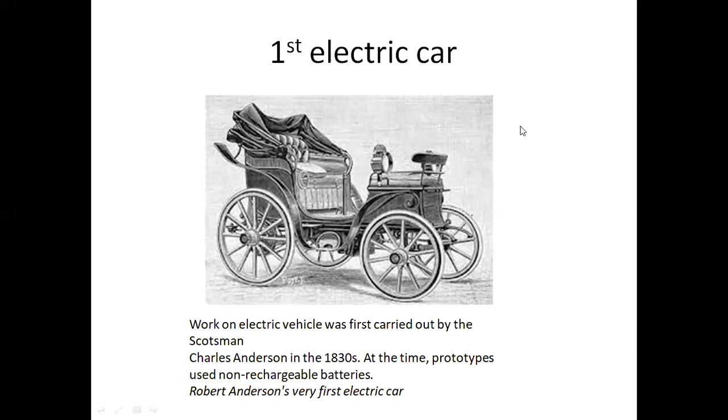I started off with the history of it. The first electric cars, surprisingly, go back to Charles Anderson in the 1830s. A lot of people don't know that, and they didn't use rechargeable batteries - it was a container underneath the driver's seat, like a copper tin with plates in, and they poured acid into it to form the electricity. You can imagine the dangers involved. They were limited by the time the solution actually worked, and it was dangerous. So electric cars haven't just come to light - they're not a modern day thing, which is one of the things a lot of people assume.

So the history - the first battery powered car, and we're talking batteries, not the early lead acid in a tank, goes back to 1881. Then electric charging points started coming in, and as you can see from the top right hand picture, it was a bit of a mess, very dangerous - health and safety didn't exist then.

Taxis started coming out in 1899, and underneath the taxi was the battery. Taxis were great because they got around town, there's no horses to feed or anything, they just kept going. And the technology itself was quite rapid - the first vehicle to exceed 100 kilometers an hour was actually an electric car.

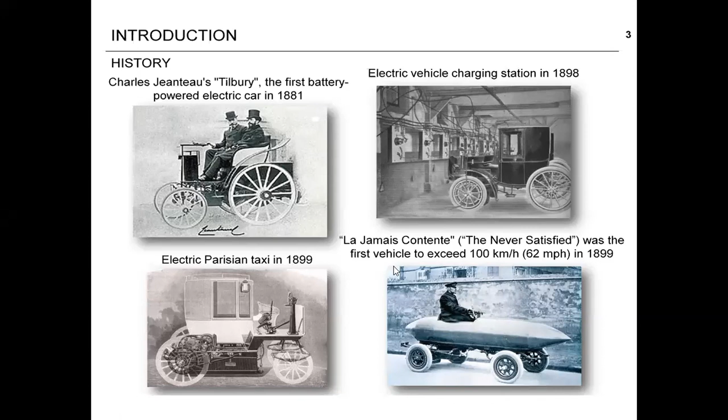So the French were really developing this and moving on with it. But petrol came out, didn't it? And as petrol came out, it took over. But they still pushed it - they modernised, if you can call it modernised, the charging points.

With the charging points, this one is actually a copy of the poster from PSA, the company that was selling these electric cars. I wouldn't like to be the person that actually plugged that in and cranked the voltage up. There's a copy of this in a museum down at Coventry, and all them connections are live.

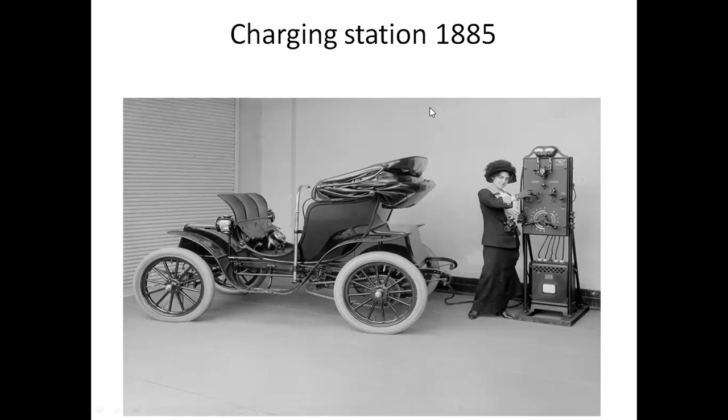Again, a bit like the car, they were just known as the horseless carriage, but very quiet. People didn't like them for the simple fact they were too quiet - people were getting knocked down, unlike the petrol and the diesel where you could hear them coming. With electric cars, you couldn't. So it did get a bit of a poor following from day one with the electric vehicle.

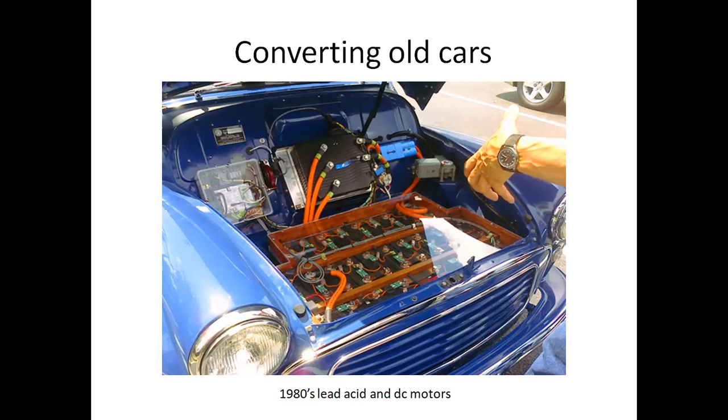The plastic perspex covers are put on top to safeguard any issues. The big black box bolted to the bulkhead is an inverter, and all the other electrics are in there. So if you've got an old car, don't think it's scrap just because you haven't got a battery in there - you've actually got one that can be converted. A number of companies do it, but unless you've got an absolute prestige vintage car, it's not really advisable.

Then somebody came up with the idea of hybrids, and they've all been petrol hybrids, which means partly it's run on battery, partly it's run on the petrol.

Peugeot brought out the very first diesel hybrid in 2011. Now, the very first diesel hybrid was a big flop. I worked for the company, I don't mind saying, because what happens with diesels is they rely on a lot of high mileage in order to keep all the injectors clean, the fuel system clean. A diesel that just ticks over just clogs up and destroys the engine.

What was happening with these was they were just ticking over to charge the battery. Then the minute the battery was fully charged, the diesel engine would cut off. So in effect, you never really blow the engine out and get all the soot out of it. It just destroyed engines left, right and centre, which created a major problem. That's why they stopped doing them.

I'll warn you about this because whenever you see one second hand, unless you know the history of it, it can be a dangerous thing to buy the hybrids. Another reason for mentioning it is nowadays you will not usually find a diesel hybrid because of all these problems they had. They've realised the general public car doesn't really work that way, so you'll only find petrol hybrids.

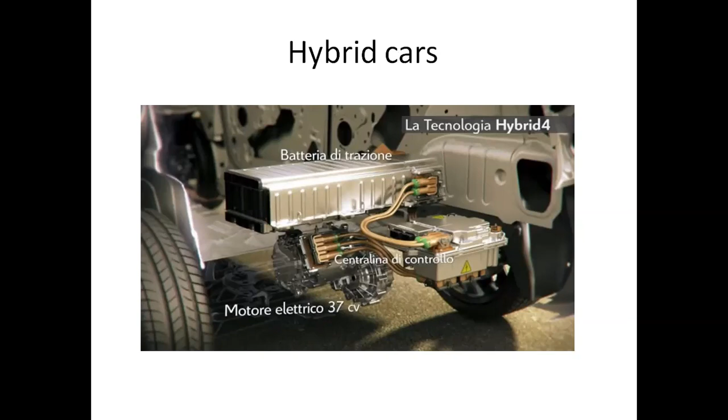That's a top view of the battery. Battery's up on top, and we've got the control unit, and we've got the spare wheel, which you don't have a spare wheel, so it's actually a pump.

All the orange cables are what you stay away from. The reason I say this is if ever you're going mobile and you decide to put a rig into your car or whatever you want to put into your car, stay away from the big thick cables. These big thick cables, no matter what the manufacturer is, whether it be Volvo, Renault, Peugeot, BMW, they're running on average 400 volts. Now, 400 volts, as you can appreciate, it'll give you a very, very nasty kick. But people sometimes see big, thick cables and think, that's carrying a lot of power, a lot of amperage. I can put a big linear on that, yeah.

So that is where the spare wheel goes. So when you're buying a hybrid, that is what you've got. Now, that weighs close on to about a quarter of a ton.

So one of the myths that came up was, well, I don't seem to get much fuel economy out of my hybrid car when it's running on petrol. The reason is because you've got a standard car, whether it be petrol or diesel, which does the standard fuel economy, 38, 40, 50 miles per gallon, whatever it does. But then it's like towing a little trailer around with you. You've got a quarter of a ton in the boot. So straight away, if you get a car and start towing a trailer, your fuel economy is going to be going down. So when people were saying, well, the fuel economy on a hybrid is nowhere near what mine is, they weren't taking into consideration the quarter of a ton sat in the boot.

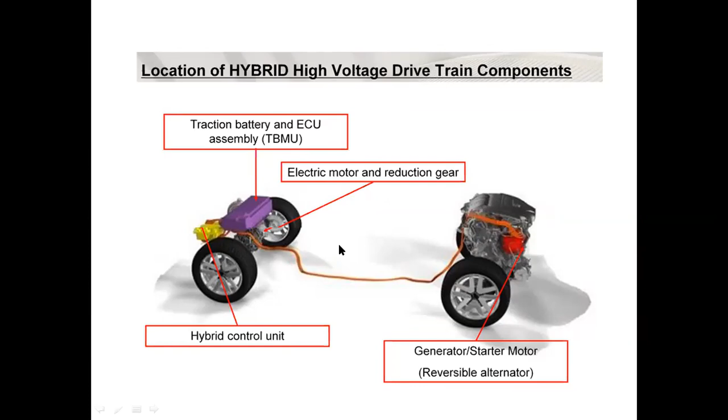With all this technology comes a bit of a problem. If we look at the diagram, we've got blue pipes. The orange pipe is actually the wires carrying the power from the front to the back, the electric. But underneath is actually the coolant pipes. The electric motor, the battery, do get hot because as you go uphill, it uses charge, but as you go downhill, it puts charge back into the batteries. And we all know when we're charging a handheld, the actual handheld battery can get quite warm. So it's exactly the same. So for that reason, the rear end is actually connected to the front end via coolant pipes.

I mention this because if you do decide to put rigs into the car and you do decide to sit there mobile and you think the battery's going flat a bit, I'll start the engine up. Anybody sat in the back seat will soon start getting a heating feeling to the back, yeah, because your back seat is actually underneath that is the battery. So they do get very warm on the back seat if you just sat stationary because it's relying on air going underneath. So it's just something that people don't realise that you've got all this.

My concern is speed humps. Underneath the car is all these wires and cables. If you hit a speed hump at the wrong speed and you do some damage, who's going to be liable? The council for speed humps being, you know, not kept the same or raised too high, or the driver because they're driving too fast. But there can be a lot of damage done underneath.

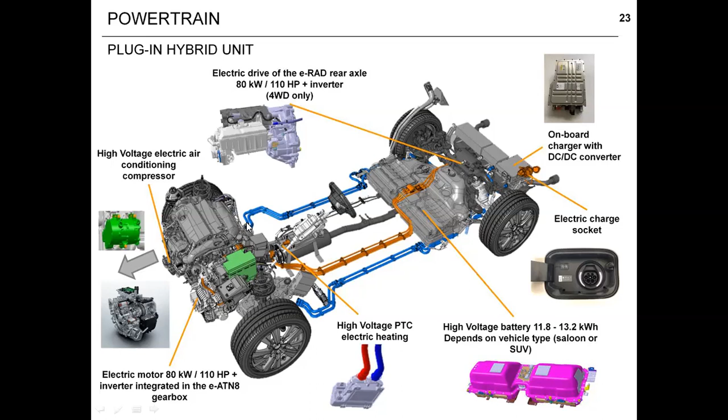If we have a look at the thing, you can see the electric motor on the back, 110 horsepower. We've got 110 horsepower normal standard engine on the front, so that's 220 horsepower this particular car will perform with. And we've also got the battery at 13.2 kilowatt hours. So it does depend on the car and everything else as to what exactly happens with these.

On an electric vehicle, when you lift the bonnet, that's what it looks like underneath. So there's nothing to check, there's nothing to see. But we do have people that pass cables through bulkheads and try to connect things to batteries and alternators to get charge for anything from an audio amplifier to a big linear for, dare I say it, CB. We have had people trying to connect 200 watt linears and coming in and saying, how do I connect this? But as you can see, every single cable under there is orange, so you cannot connect to that.

Underneath the bonnet is pure 400 volts. That's all there is. But what you have to be careful of, and what a lot of people don't understand, is this is where it starts getting a little bit dangerous. It's not just 400 volts DC.

In order to make the motor more efficient, and if you remember at the beginning I was saying that when you put your foot on the accelerator it takes time sometimes for it to respond, depending on the weight, the way we've got around this is to do it at 400 volts, 3-phase AC. So you've got inverters that convert the 400 volts DC into 400 volts AC. So you have actually got 400 volts AC floating around in the car. So this is where it starts to get a little bit dangerous.

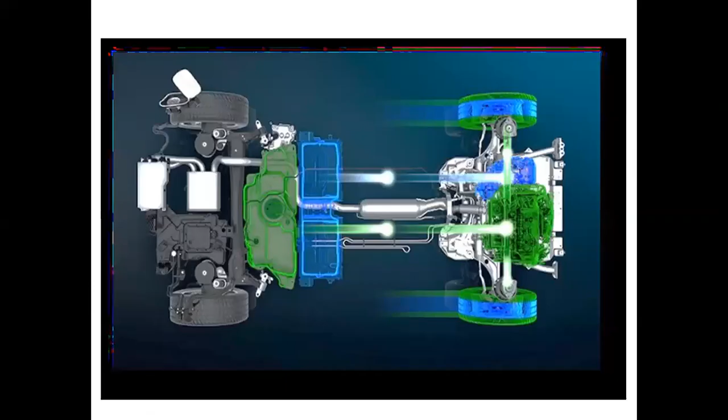This just gives you a diagram of what actually happens. The green are the power units. We've got at the back the green fuel tank because it's a petrol car. We've also got power going from the petrol tank up to the actual engine. So it takes fuel, takes it up to the engine, that produces the power, it goes down the drive shafts and it moves. But also we've got batteries under the back seats. That takes 400 volts up to the electric motor, which is up at the front on this particular model. So you've then got an electric motor that can also power it. So the clutch can disengage between the engine and the electric motor.

So the problem with that is it's got to disengage while you're driving and switch between petrol and electric. And again, that's where the electrics come in. You have no control over this and you have no say over it. Computers do it. The average electric car has somewhere in the region of 24 computers controlling everything. So when you install something extra into an electric car, one thing you've got to be careful of is where you connect. Because if you connect to the wrong thing and it messes around with the data wires, or takes a little bit of the feed or the earth, because they're very critical, these 0.3 of a volt drop can actually throw something out. All sorts of faults and they just won't move. They don't come up with the engine warning light on the dash. They just don't move.

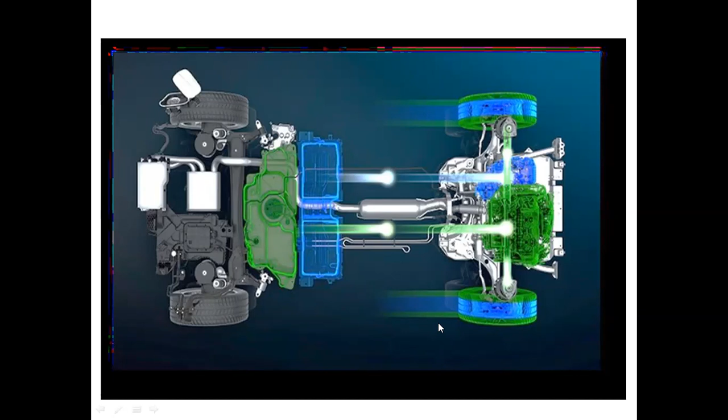It's a fairly generic thing that goes through all manufacturers. If you look at the back of a BMW, a Volkswagen, an Audi, Peugeot, Citroen, they're all the same. There's one company in Morocco that makes these for all these manufacturers. So it's a fairly generic thing that is made, but it is quite a complex thing. Like I say, between that and the battery, there's a quarter of a ton.

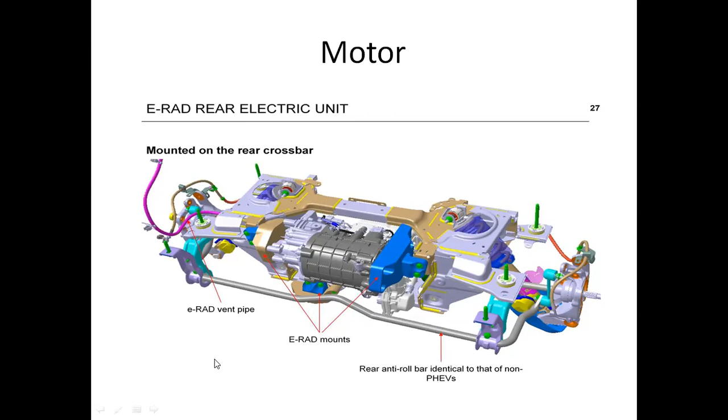So it's not something you can repair at home, but it gives you an idea of what's underneath there. We have actually had a car in the garage that had the motor banged. They'd gone off-roading a little bit and managed to somehow get a boulder into the motor and damage the casing. So they're not indestructible by no means.

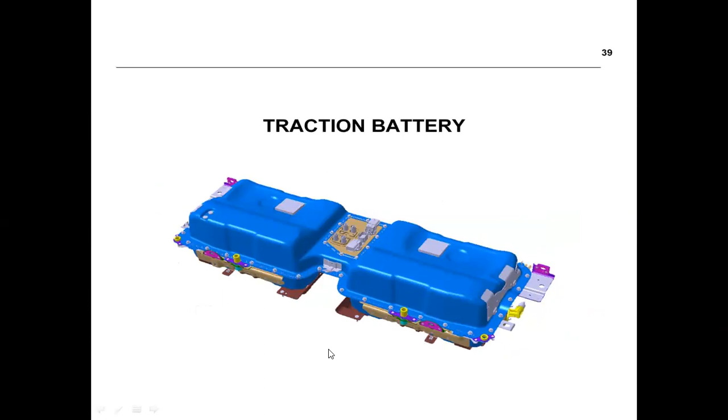One bank on the left and one bank on the right. The bit that goes in the middle, you think, well, why does it? That's actually the exhaust. The exhaust runs down the middle of the car, just the same as any other standard car. It's just this is basically you've lost half a fuel tank. That's how they've done it. You've lost half a fuel tank to do that.

It's handy to know what's in the car and what's underneath. People say, well, what mileage will it do? How far will it go? Basically, how big is the car? Because the floor of an electric car is the battery. So the bigger the floor, the further it'll go.

If you look at the area of a Tesla, the actual area that the floor pan covers, which is where the seats go, is much bigger than most cars. So therefore, the car can go a lot further. But with the bigger battery comes more expense, hence the reason why a Tesla is so expensive. How it produces everything is pretty much the same, the technology's there, it's just their battery is a lot bigger, hence the car is a lot heavier. And for that reason, yeah, I wouldn't say it's a better car, just more expensive.

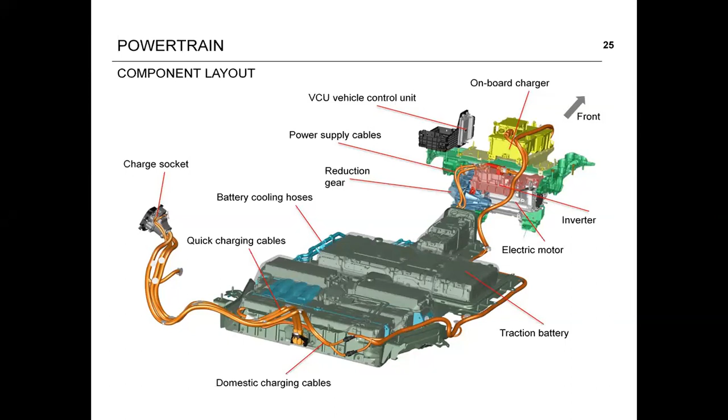The vehicle control unit, which is just next to the onboard charger, is what replaces the old engine ECU, the old computer. It still has one of them, and it still controls everything. But it just gives you an idea of what's underneath there, what exactly is going on.

There are 2 versions of the battery that's made. At the moment they're made in China, 11.8 kilowatt hour and 13.2 kilowatt hour. There are factories now coming up to compete with the Chinese, which will bring the price of a battery down. If anybody's wondering the price, we do hear rumours: hybrid batteries average between £5,000 and £8,000 depending on size, and a full electric one is between £12,000 and £15,000 just for the battery.

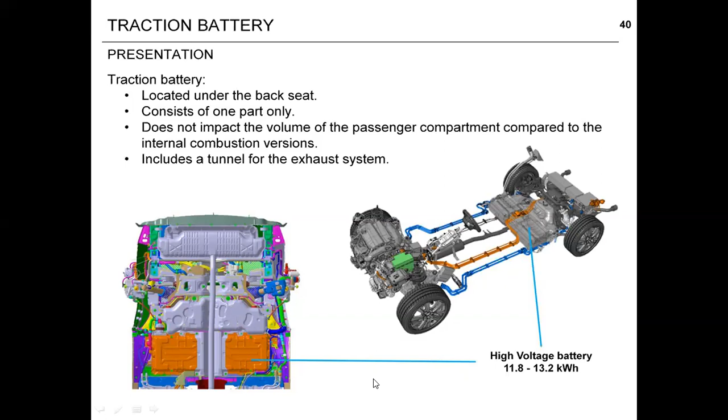Then they have to be fitted. So that's what one looks like.

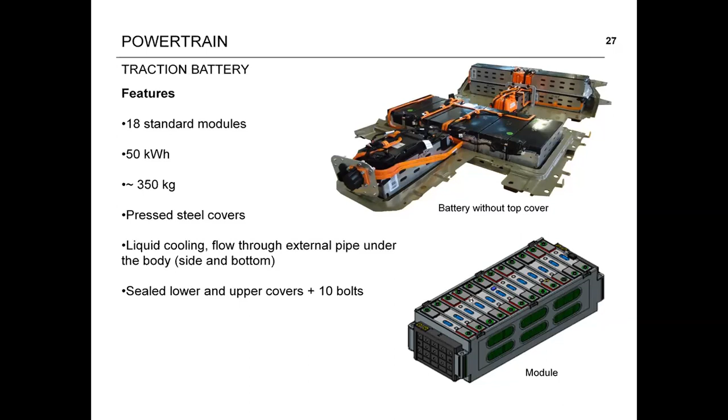The problem is, when you discharge a battery and it goes flat, you tend to think that's it, it's flat. But as we know, if you put a voltmeter across a battery, even though it might not be strong enough to work anything, there's still a few volts left. When a hybrid or electric car battery goes flat, it's exactly the same — just because it won't power the system up and the gauge shows it's flat, there's still over 200 volts in the system. So even though the battery shows flat on the car, you're still working with a 200 volt system. That means on the DC side there's 200 volts, and on the AC side, through the inverter, there's 200 volts AC. It's worth remembering this for safety.

That just gives you some specifications. LG Chemical are the ones that actually make all the batteries at the moment, though there are other manufacturers. You can see 216 cells, each cell has 3.7 volts, and it's rated at 400 volts. The battery itself weighs well over a quarter of a ton.

You have to use an engine lift basically to lift it, it's that heavy. We tried to lift it with 6 lads and just about got it off the ground, out of curiosity to see how it was. But they are monstrous things, and if you damage them you will be paying for it. They're guaranteed up to 10 years, but if they're damaged in any way, shape or form, no guarantee. They're inspected closely to make sure they're not damaged, because they just don't want to pay for something — I don't think that has hit a speed hump. So it gives you an idea what's in there.

I said the battery itself covers the actual floor pan. This is just a typical little runabout, as they say. It goes underneath the floor, so you're actually sat on top of the battery. So just bear that in mind.

I've had one case so far where somebody fitted an audio amplifier under the back seat of the car, drilled through the floor to mount the bracket for the amplifier, and drilled straight into the battery. Very expensive — it cost them 11,000 quid for a new battery.

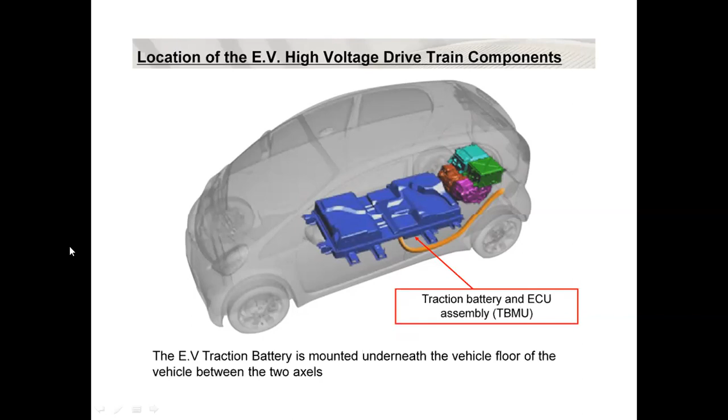So just be aware of that when you're mounting things on the floor. Your battery's underneath there and there's very, very little clearance — only about 3 millimeters between the battery and the floor. So you can't really mount anything under your seats. I know in my own car, I have an FT100, the head is on the dash, but underneath the passenger seat is the actual unit, and the bracket to stop it floating around is drilled through the floor and everything mounted. I couldn't do that with an electric car. So even though this is an electric car talk, it does relate a little bit to the mounting of things.

You've got very little room there, especially when it's only 2-3 millimeters to the actual floor itself. The bit in the middle is where the rear passengers put their feet. So you start to appreciate some of the problems you have, not only with driving over speed humps or rough ground, you've got to make sure you stay well clear of that, and some of these cars are very low nowadays. Also from my amateur radio perspective, it's mounting stuff.

You'll be pleased to know that these things are so well shielded from RF. I've done up to 2,500 watts and not interfered with anything on the car at all. So they are quite shielded. I've even thrown the SWR out through a tuner up to about 3.2 at 2,500 watts, and still no interference. So you don't have to worry about that aspect of it. All the electrics do not interfere with amateur radio - it's your mounting of your equipment that's the problem.

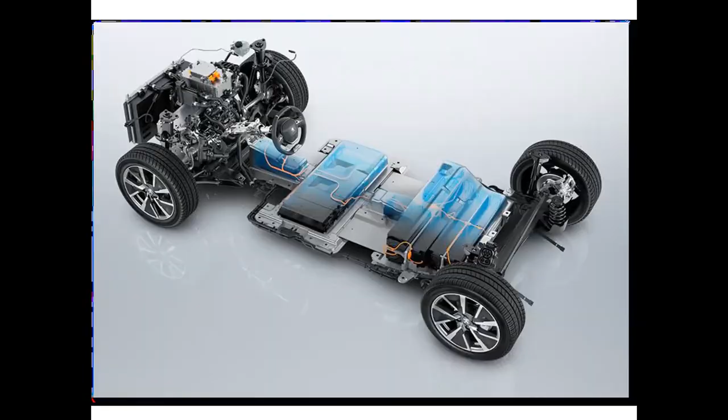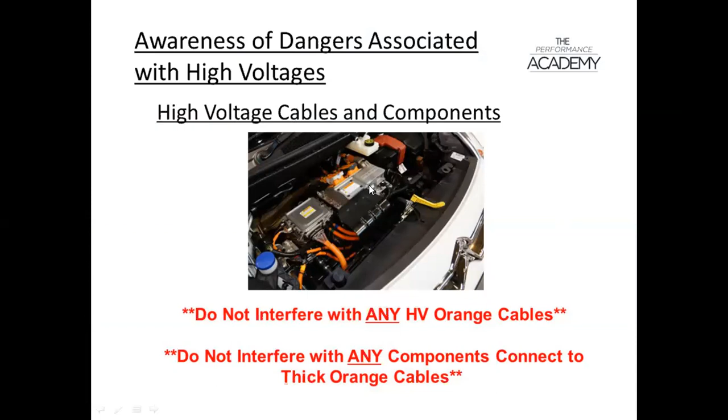I'll just reiterate, do not touch anything with orange cables. These thick orange cables are carrying the high voltage. If anybody does get an electric car and lifts the bonnet just to top up the washer bottle, you'll notice about 70% of it is orange electric cables. So be very aware of that.

Charging. Now, one thing we get a lot of questions about, people are a bit stuck on the charging point. In this particular country, we only have one charging system, it's called the Type 2, and it's in Europe as well, but others like America have other charging systems. The Type 2 is the most popular.

You've got AC fast charge or DC rapid charge. AC fast charge is the sort that the lady's doing, which is plugging into your house. People think they have to have the drive dug up and all sorts done to get these charge points in, because they're carrying high currents and things like that. But the AC fast charge is 13 amps, that's all it is, so they don't have to have anything done.

The way it's normally done is it's mounted by an electric company, and that particular AC fast charger is about £300 installed. So it's not expensive. The rules are, you can see the cable running along the ground - the cable must not be anywhere where the public can trip over it. They're not bothered about you. So basically, if you can't have it on your property, you can't have it.

I live where it's a country lane and there is no way to have one of them. So I can't have an electric car unless I come up with something - the car has to be parked a few hundred yards away from the house, and I can't have a charge point there. So that's something to bear in mind when you're buying an electric or a plug-in hybrid - where the charge point goes. We do have people that buy cars and then try to work out where the charge point goes and find they can't have one.

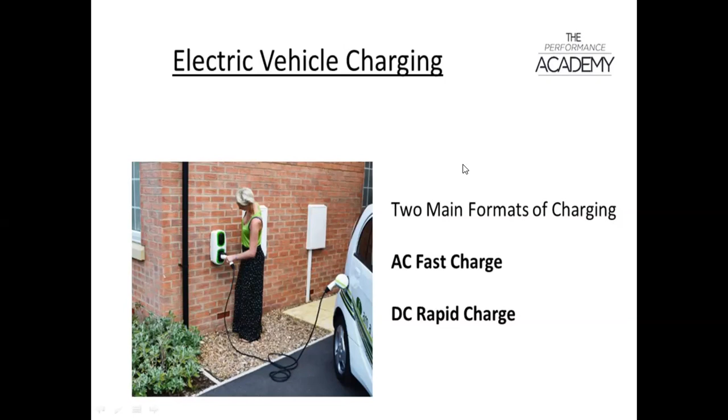The only way you can charge your car then is to go down to Tesco's or Morrison's or a supermarket, charge it there, and bring it home. There's also the domestic 13 amp plug that just plugs into the wall. The difference is the AC charger will charge it in about 6 hours, the 13 amp plug-in socket will charge it in about 8 hours. So there's a couple of hours extra for charging, but it is an alternative.

You can't have a charge point, but we have one customer that we've had in that actually charges it up at work - while she's at work, she plugs it into the wall in the office and runs the lead out of the window and plugs it into the car. So it's a bit of a weird way of doing it.

It says at the bottom, disadvantage 30 hours to fully charge. I've never known a car to fully charge from flat in 30 hours - the average time is 8 hours. It does tell you on the display how long it takes to actually charge. So the charging is one thing that has to be really taken into account when you're buying a car.

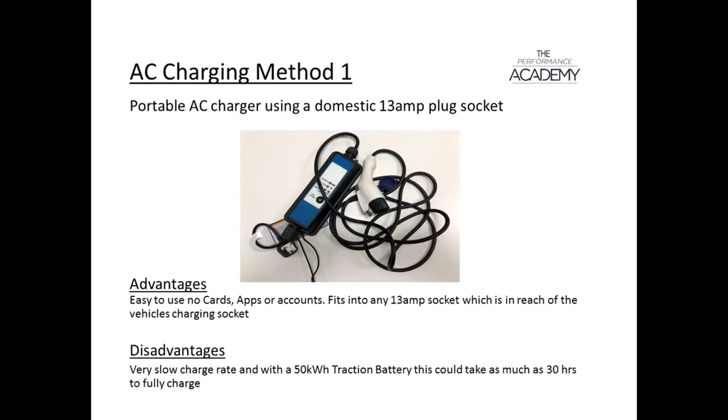There's various different sockets for fast charging - we've got the type 2 socket, as I've already explained, which is easier to plug in. Depending on what the charger does, the actual charging unit in the car park or wherever it is can be a 3 kilowatt or a 7 kilowatt charger.

So in order to charge your car, you either have to pay with your debit or credit card, which can come at a bit of a premium, or you can buy one of their loyalty cards, which gives you a discount. The problem is, if you go from northwest England to the south of England and it's another company, your loyalty card won't work there. So unless you've got another form of payment, you can't actually charge your car, which can cause a bit of a problem. So be aware of this.

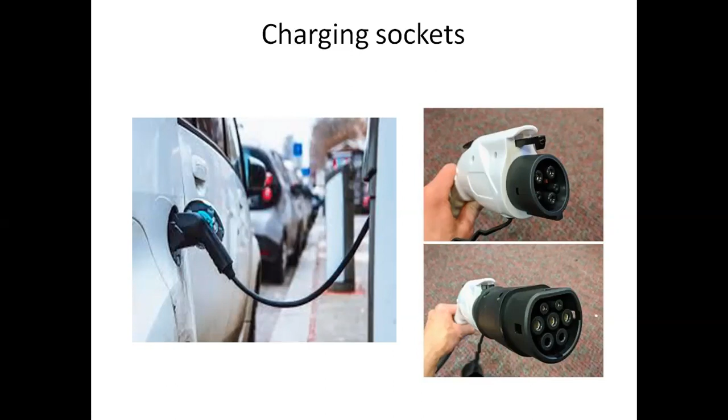It's easy to carry the charging lead in the vehicle, but people do forget and leave them at home, unfortunately. This gives you an idea of some of the charging sockets out there. We've got the Japanese charging socket at the top, type 1, but as you can see in the bottom picture, they do an adapter, so all is not lost. There's only about 3 or 4 adapters, and if you get those, you can actually charge anything, anywhere. You just have the problem of making sure you can pay for it, that's all.

A lot are going over now to apps on the phones, very easy to use, but again you've got to make sure you're with the company that can do it. You can see halfway up the actual charge point is the contactless payment. How it works is you plug your car in, then make a payment - so you don't pay after you've charged it, you pay before. A bit like using petrol pumps.

It then locks the car in place, so nobody can unplug it until you get there and unlock the car, and it just charges it. It charges you for the amount of electric it took to charge it, or the amount of electric it took whilst it was plugged in. So it's just something to bear in mind.

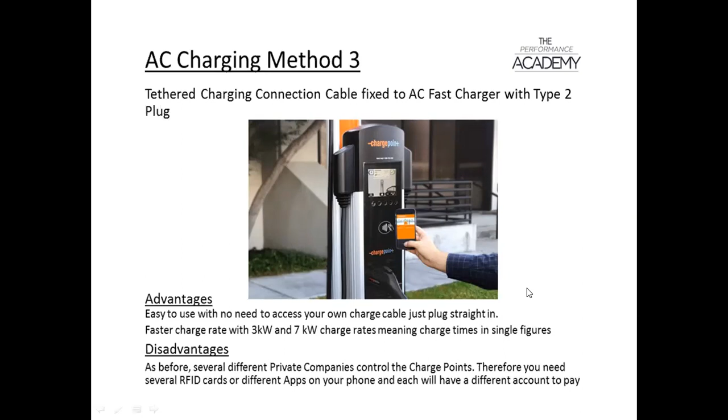We do get some fancy charging stations which have every kind of socket there is - there's only 3 in this country. The middle one is the fast charge, which more or less dumps 400 volts into your battery in about 8 minutes. If anyone's seen the advert on TV where I think Esso are doing an all-electric charging station to replace a petrol station, this is what they're using. So when you pull up, it'll charge your car in about 10 minutes.

If anybody's noticed, a lot of petrol stations, service stations now have got Costas and Subways actually attached to them. The whole idea is you pull up, you plug in, go and have a brew, a sandwich, come out and your car's fully charged. This allows you to carry on your journey and keep going. What you have to bear in mind is, as we all know from charging up portable radios, if we use a fast charger the batteries get absolutely red hot, so you need to let them cool down a little bit.

Because the battery could be damaged, once you've done 3 fast charges, the car will only do a slow charge. So even if you plug it into the middle port, the yellow one which is the fast charger, it will only actually charge at a slow rate. On the 4th time you might only get a 20% rate, so you'd probably only get about 50 miles down the road, then you have to plug it into another fast charger. Then you get another 3 fast charges and need a slow charger again. It's nothing to do with anything other than protecting the batteries and keeping the life of each battery working as long as possible.

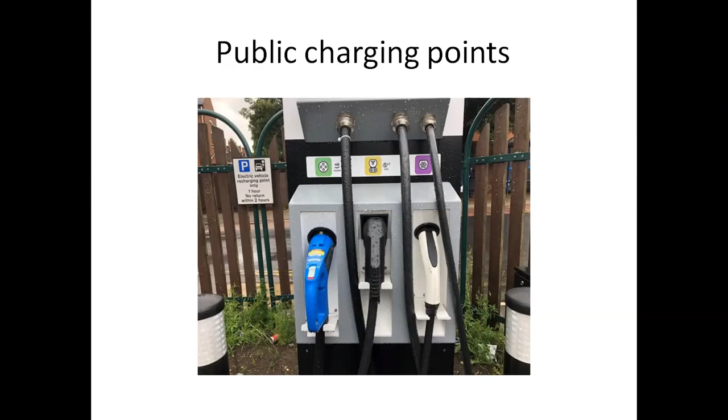Looking at the CCS, which is the fast charger, the 2 bottom sockets are what actually charge the battery at a very, very fast rate. If you're only doing short mileage and you're going to buy an electric car, the top port is usually what comes with it. You have to make sure you have the bottom 2 connectors on the actual car. If you buy a car and it hasn't got that, be aware the car cannot be upgraded - you'd have to get rid of the car and buy another one.

So it's like, I do a lot of mileage, so I had to make sure that when I'm using one of these electric cars from work, I actually have the fast charge ports. If I use one without the fast charge ports, and I do a big trip up to Scotland, I've got to literally park the car up overnight and charge it overnight - otherwise it just won't move. And again, it's about 80% of the charge on the fast charge to protect the batteries, but it'll still get you a few hundred miles, so you can get around.

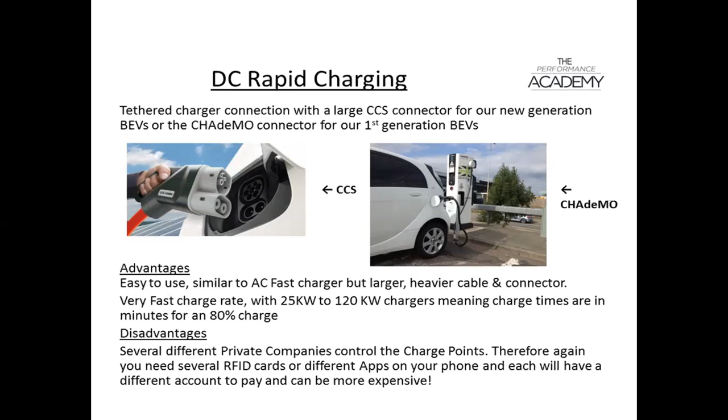Disadvantages down at the bottom - several private companies control the charge points, so it can be horrendous to actually pay for it in this country.

When you plug it in, you've got lights that let you know it's charging, let you know there's a fault, and everything. It is fairly waterproof - the whole thing is insulated from everywhere else, so if you're washing the car, pressure washing it or anything like that, you don't need to worry, you're not going to get an electric shock. It's all designed around the actual voltage going one way. There's diodes and everything, so the terminals you can see, those little metal terminals, are all dead because the diodes only go one way. The diodes are designed so that if voltage tries to travel the other way and the diode fails, the diode explodes to prevent anything happening.

The problem is, if that happens - you pull up at a service station, there's been a fault and the diode's blown - you can't charge your car because it's a physical break then. You plug it in and it just flashes red to say there's no voltage going anywhere. So they do have the drawbacks. When they break, they're designed not to move. With a petrol or diesel car, if something goes faulty, we've all been stuck behind the car chugging out black smoke because it's faulty. Electric cars and hybrids don't work like that - when something goes wrong, they stop dead, because potentially you could have 400 volts DC going around the actual chassis of the car.

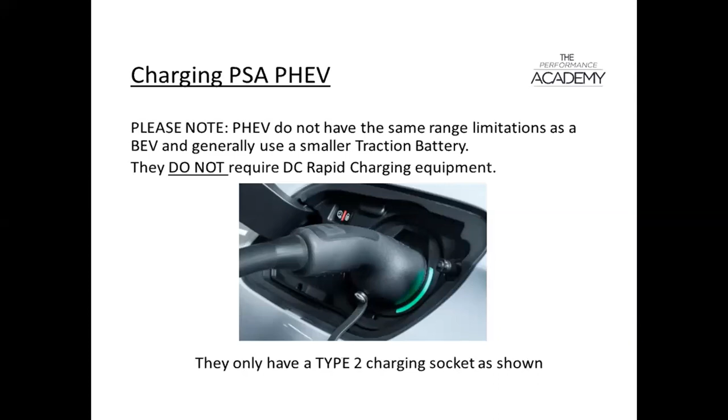With that in mind, there are precautions. Every single owner's manual has this - you've got the hybrid, 2-wheel drive. It's possible to lift the front wheels because usually it's front wheel drive, but you can't lift the rear wheels. You can put it on a trailer, but you can't tow it. The reason is that whilst the motor is used as a motor, once you're freewheeling it's used as a generator. If you had an electrical fault - a wire shorted out because you've gone over a speed hump - the problem is that by towing a car you could potentially have 400 volts going into the chassis or into a defective battery that's discharging. The minute someone touches a door handle to open it, you get an electric shock. So this is very much about safety.

The advice from the fire brigade is if your car breaks down, leave it and get the experts - don't even lift the bonnet. The reason I say that is if the electric car catches fire, they burn well, and the fire brigade won't even come out to them. So that's another story for another time.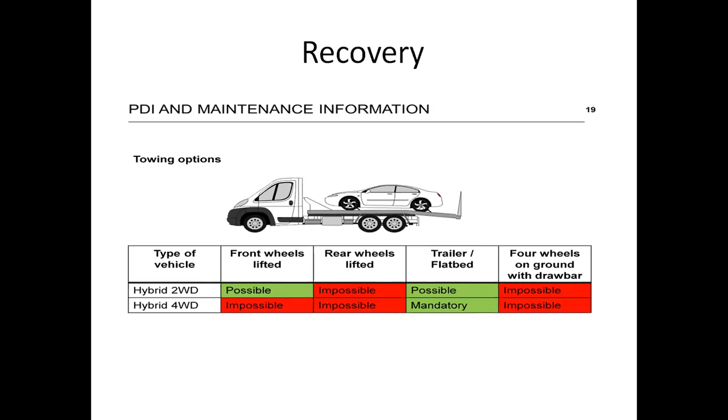When cars go faulty and you go into the workshop, don't expect them to be repaired the same as a normal car. Because of the 400 volts, there's only people that are authorised and qualified allowed to go within the working area, and the car is disabled, shut down, and left to power down for 2 hours.

So if you have a fault with an electric car or hybrid car and you go into a workshop, the first thing we'll do is go out there with a meter and make sure it's safe, i.e. no electric going through the bodywork. Once they've done that, they'll shut the car down, and nobody will go near the car for 2 hours.

In the old days, when your car used to break down, it used to get towed in on the AA, the RAC, or a breakdown company, and they'd say, just take a seat and I'll get a mechanic to have a look at it. Now it's, we'll organise you going home, and you might not see your car for days while it's being sorted.

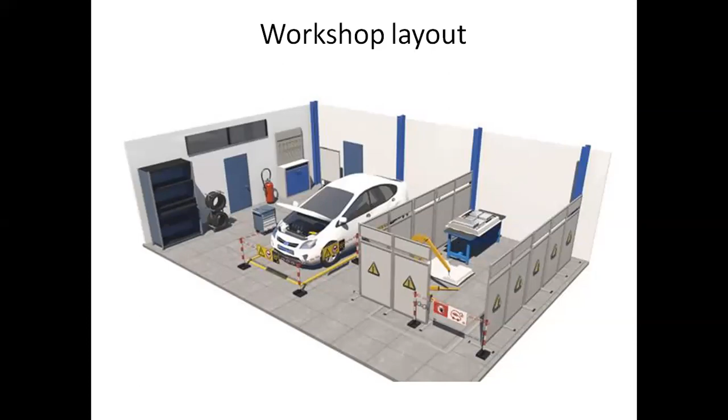So just something to bring to your attention, because some people I've heard say, well, I took my car in, it's only had a warning light on the dash and I saw it a week later. So, yeah, that gives you some idea of what's out there at the moment.

We're talking about power. The saloon, the plug-in hybrid, has 225 horsepower combination between the battery and the actual engine. And if you look at the SUV, that's 300 brake horsepower. That's a lot of power.

I brought this because some people are saying it's absolutely awesome, the power in it, and they don't realize how fast they can go. I've seen so many knocks and bumps because people accelerate so fast, and the standard car in front can't accelerate as quick as one of these, and they literally go straight up the back end of the car in front.

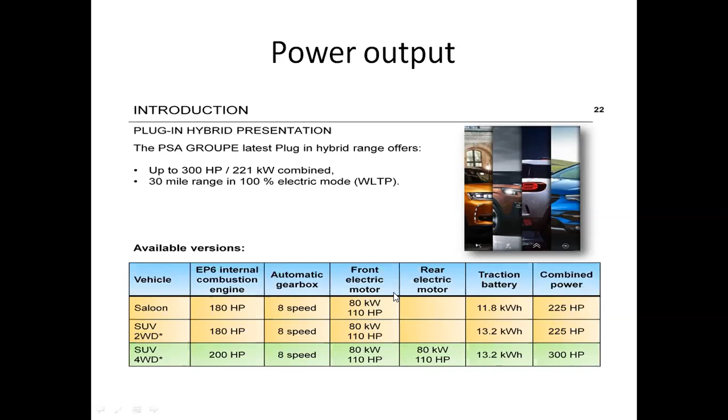But if you actually do a lot of heavy motoring, put your foot right down on the accelerator, you can see the range is only about 30 miles. So it depends what you want to do. I'd sooner drive comfortably, but just be aware of that.

We talked about computers. This just gives you an idea. When we design the computers on a car, we don't look at a picture of a car. This is the architecture of how we design it, and what does what. So it gives you an idea of how the computer works.

We have now started putting into the owner's manuals that amateur radio equipment can be used up to the power of 100 watts. That is now in the owner's manuals on most manufacturers. We've tested up to 250 watts, but we're putting 100 because that's what the standard equipment does. If you put a linear in there, then obviously it's on your own head. But you will find that now in owner's manuals.

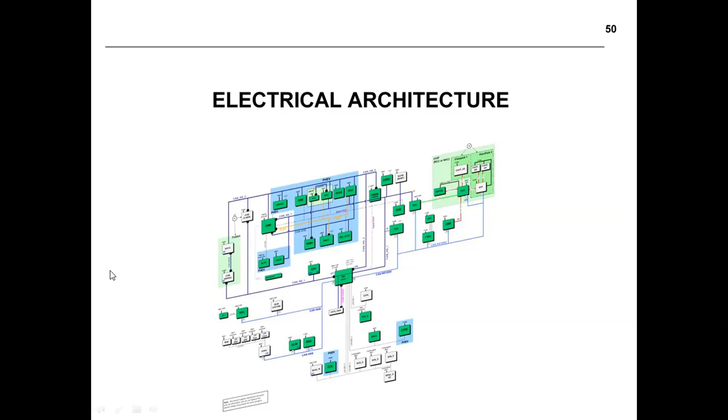But anybody who wants to know about the architecture, how computers work, how they're all linking together, how the CAN networks work and everything else, that just gives you a bit of an overlay. It's a little bit complex to go through on this particular one, but you never know, you may want another talk if you want to get a bit more in depth with that.

Most of them use a system called FlexRay, if nobody's ever heard of it - High Speed 2, FlexRay. I was on the development of this, but you can see how everything is linked to everything else. The reason behind that is if something goes wrong and we've got 400 volts we're playing with, it's all like a daisy chain. So once you break that daisy chain, the system shuts down, and that's how it's designed, as a pure safety thing.

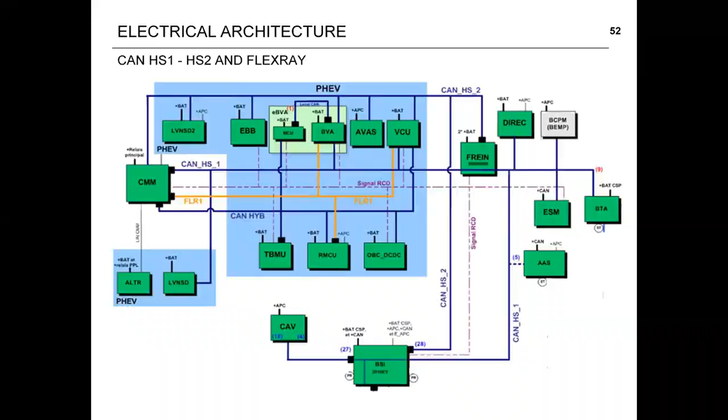But yeah, that is just your electric car. Gives you an idea of what controls the actual motor and the battery. So yeah, and it brings you back to the same old thing: do you buy or do you convert?

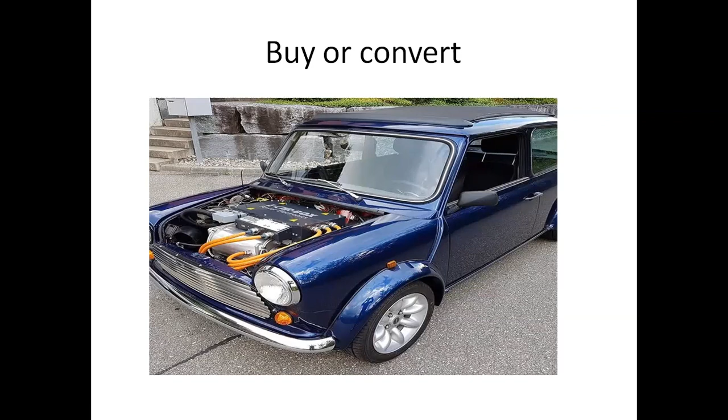If you look at the front, you can actually see the silver bit barrel at the front is actually the electric motor. So it depends how much you love your car, that's what it boils down to. But it shows you can fit it into a Mini. This particular Mini, the picture we saw at the beginning, had the batteries under the bonnet and a motor in the boot. This one is reverse - the electric battery is in the boot and the motor is under the bonnet. So just for clarity, they've taken the bonnet off so you can see. Yeah, so that finishes that.